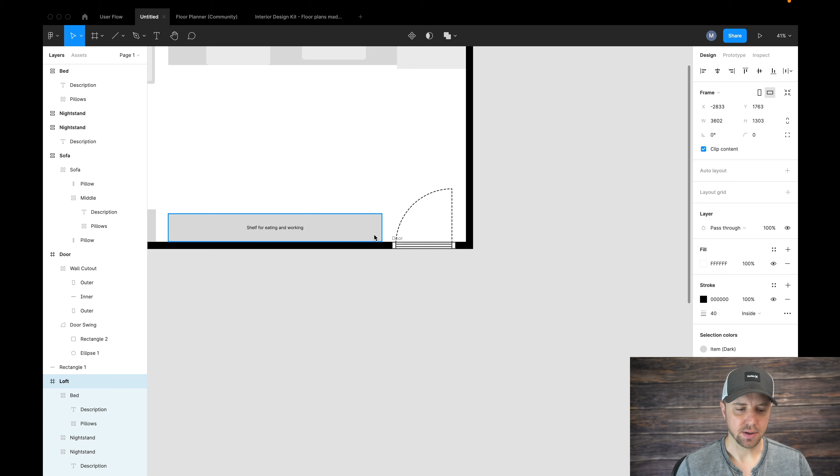The opposite side will be the kitchen, with the basics - fridge, sink, stove, a little bit of counter space. I'm not sure as far as the exact placement of these, but that'll be that.

I'm thinking cabinetry along the bottom and shelves on top to keep the price down a little, and so guests staying here don't have to open all the cupboards to see where anything's at - they can just see, oh, there's the glasses, oh, there's the dishes, and grab it easily.

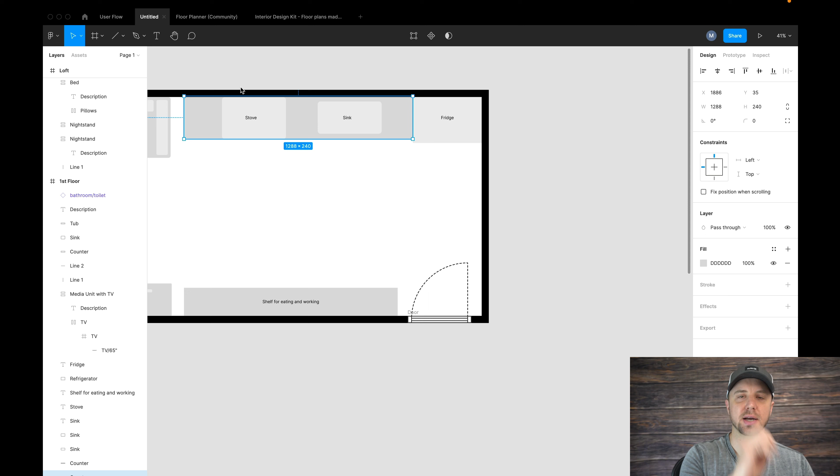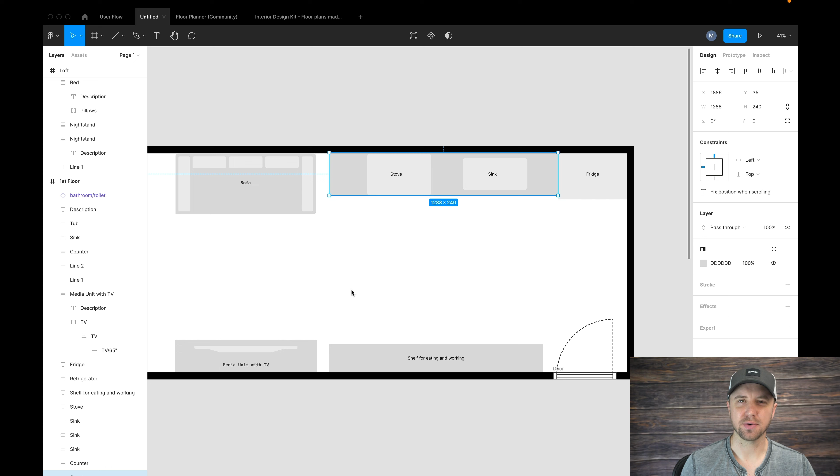Next to that will be the sofa, which I'm thinking will fold out into a bed as well to accommodate additional guests if necessary. I'll probably have more seating of some kind - maybe a small table or a bean bag for additional seating. So probably a 3-person couch, plus some additional seating beyond that.

A TV here, and at the end the bedroom with probably a queen-size bed, and a bathroom with a full-size shower, toilet, sink - all the basics you would need. That pretty much does the whole first floor here.

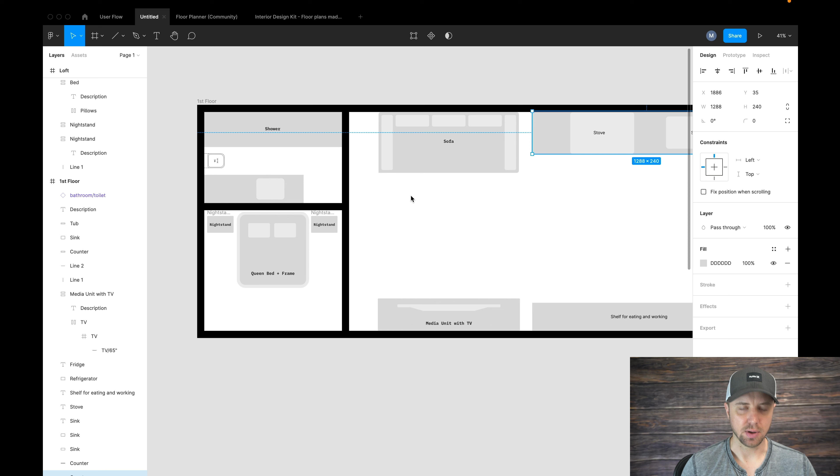This is going to be a 1-floor place, but with a loft, which I'll get to in a second. I'm not sure as far as the layout goes - definitely the furniture, but even things like the shower might be on this side. I'm thinking I'd rather have the bedroom on this side, so there might be a window here looking out into a little lounge area.

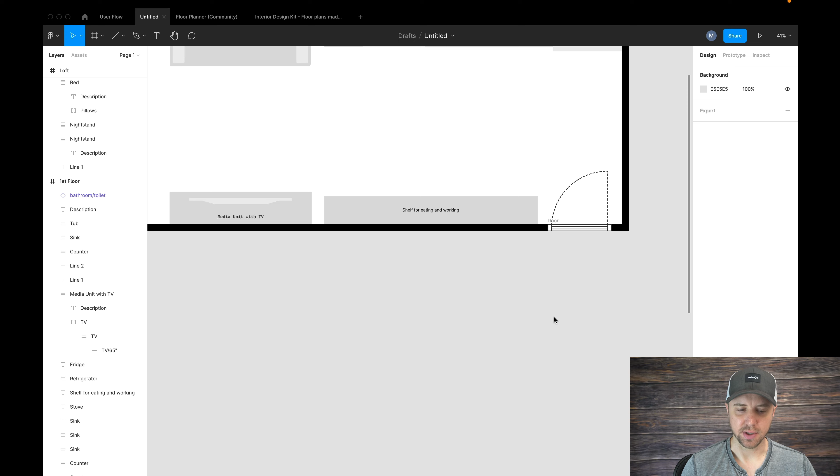I might put a small deck or something so people can chill out here. I'm thinking about that as well, and it could span the whole length of the place, maybe a small deck that goes all the way down and gets a little bigger over here. Not really sure yet, that'll be kind of down the road, but this is the main idea.

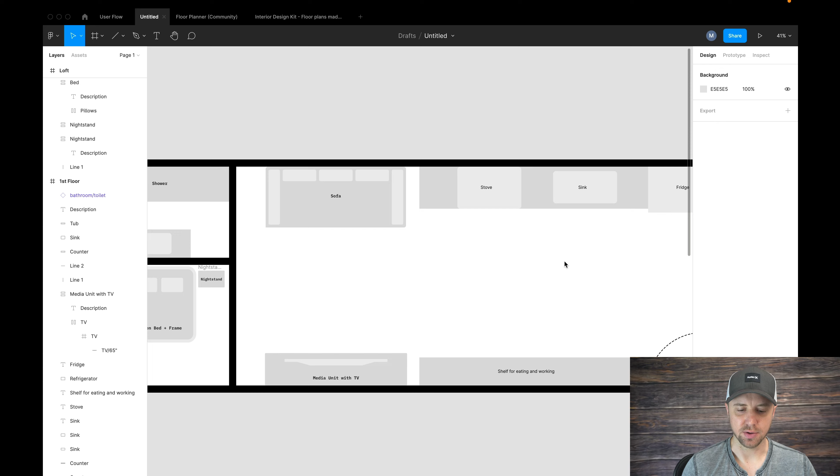So these walls will be about 7-foot, and this area will be all open up to the very top of the building. But I'm going to put a loft up here, so it'll be nice high ceilings in here when you walk in the door.

On the far end, above the bathroom and the bedroom, I'll have a loft space. This can be for anything really - storage, maybe a game room, or just a place to chill, whatever you want. But you could also throw a bed up there for additional guests if necessary.

So this place comfortably fits 2 people, perfect, no problem. I'm thinking about 450 square feet or so in total, not including the loft.

So that's just the first floor - 450 square feet or so - and then with the loft, if you include that, it's going to be a little bit more.

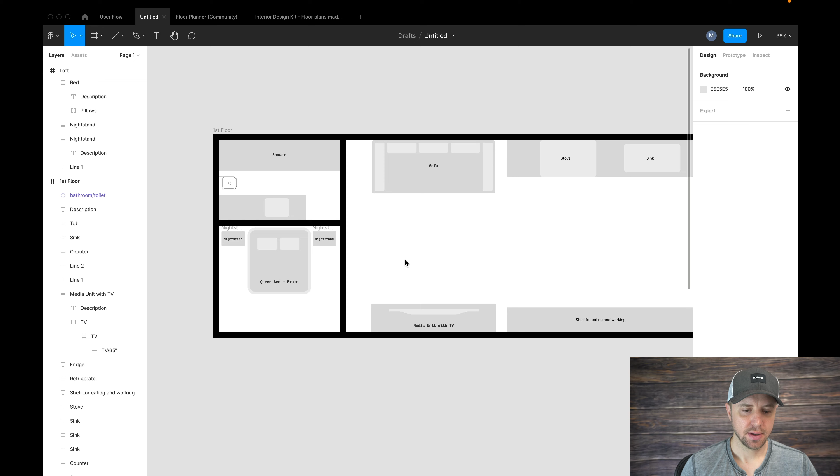I'm thinking maybe a larger bed upstairs since there's a bit more room, might be a king size, and then the bedroom might be a queen size or something like that. To get up there it'll probably be some kind of ladder, not quite sure yet - might be stairs or something. Haven't really fleshed that out, but it's kind of a flex space for whatever it may need.

Other specifics: it's going to be a metal roof, and it's interesting - if you use a traditional roof with shingles, it has to be a certain pitch. It can't be that flat; it needs the right amount of angle for runoff and everything, and there are specifications for that.

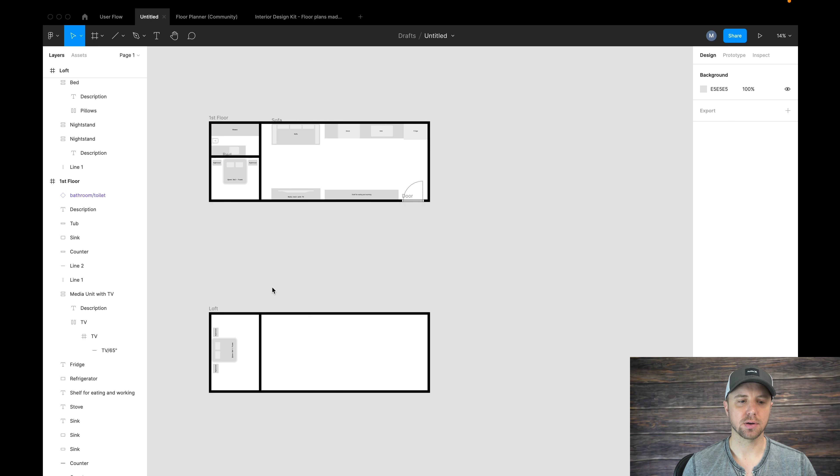But with a metal roof, you can actually have less pitch, so it can be a little flatter. I like a traditional pitch like this because it allows a lot of headroom, especially up in the loft, and there's a nice big open space. But the fact that it's a metal roof means you can have less slant to it.

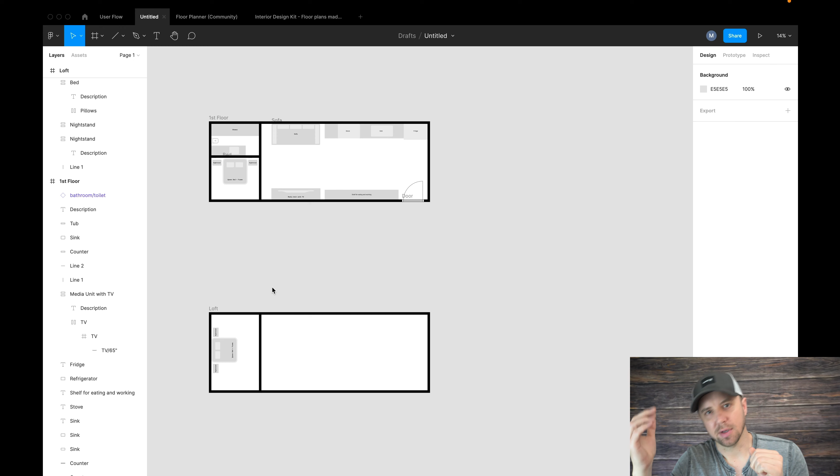One side will be a little more slanted than the other, especially up in the loft - one side lower, one side higher. But we can minimize that with the roof being a little less pitched, a little more flat.

So I have an example here, and this isn't exactly what it's going to look like, but basically it's going to be a rectangle like this. I probably won't have this overhang, but basically this kind of basic rectangle shape along the back end of the property there. And looking back over here, you can kind of see how my layout's going to be.

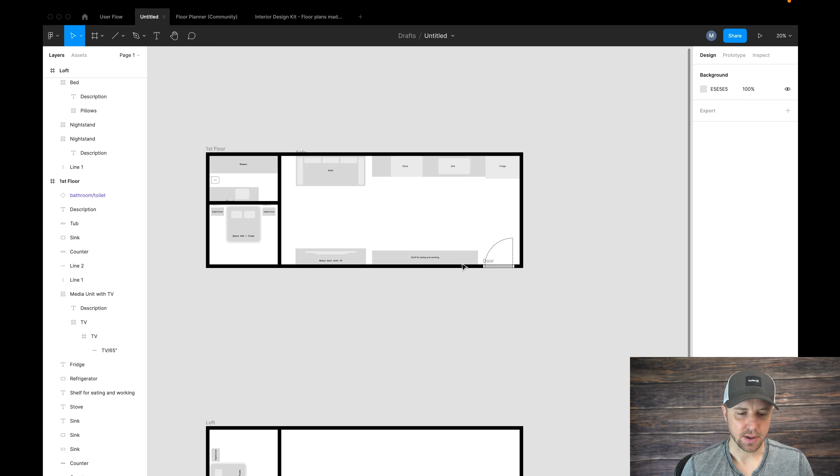But that's where we're at right now - they're going to put some plans together, some options, and I'll be like, oh, I like this part of this, and they can probably adjust some things and make it exactly how I want.

And then from there, they're going to start picking materials - what couch do you want, what tile do you want, what flooring do you want - just going through all the things, all the specs, so everything's ready to go.

And I can just hand it to my contractor and he can get to work building it. But I'm going to be helping as much as I can along the way, which will be interesting, and I can learn a lot. That's basically the whole point of doing this - I can have a guest house, and I can learn in the process and share my experience.